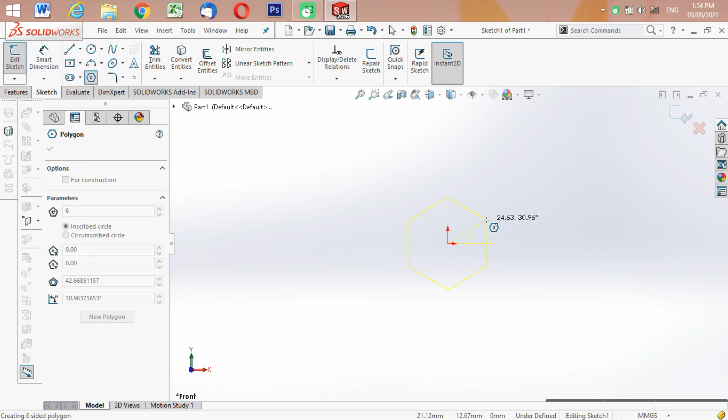Select extrude, click front plane, click polygon and draw polygon. Click circle, draw a circle and click OK.

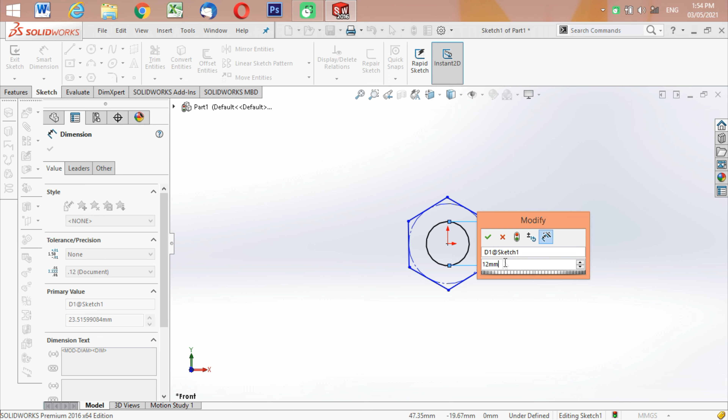Enter dimension, 12mm. Polygon, 18mm. Click OK.

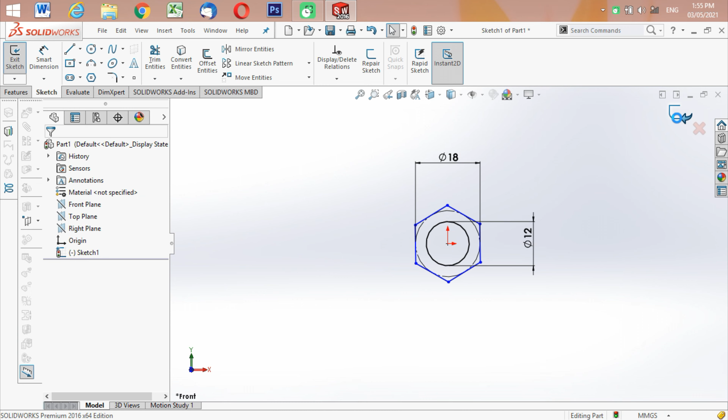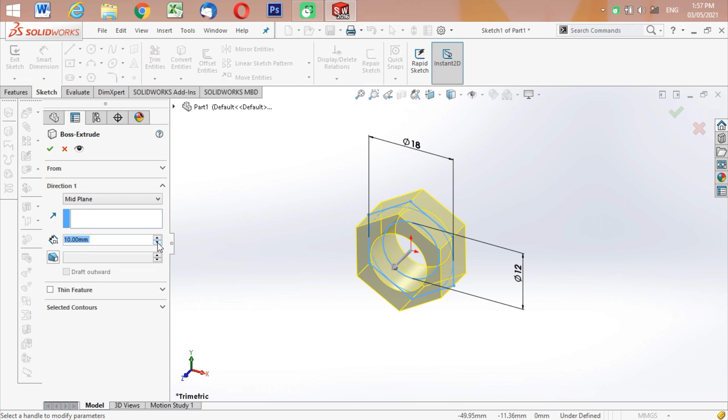Select boss extrude. Select mid plane. Can add the parameter. It is your option if you want long or short.

Select helix and spiral, click here. Select circle and draw a circle. Click OK.

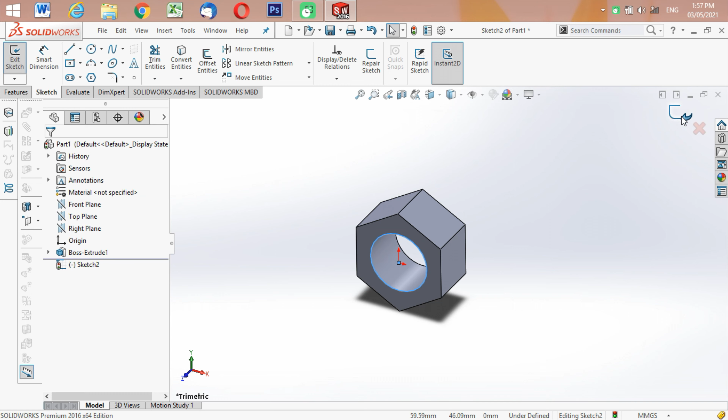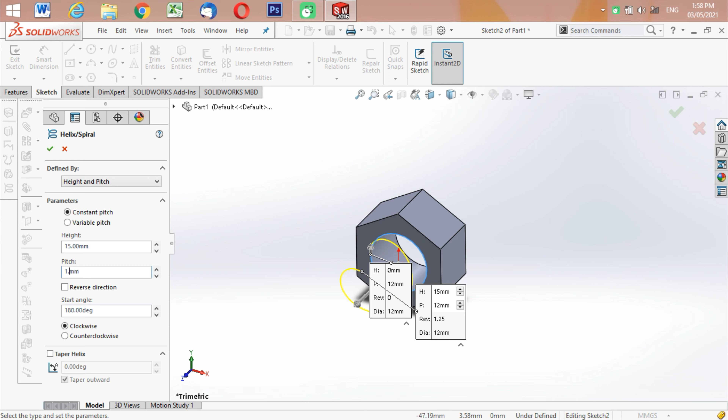Exit sketch. Select height and pitch. Height: enter height 15mm, and pitch 1.75. Okay.

Select reverse direction. Start angle 0.0 degree. Click OK.

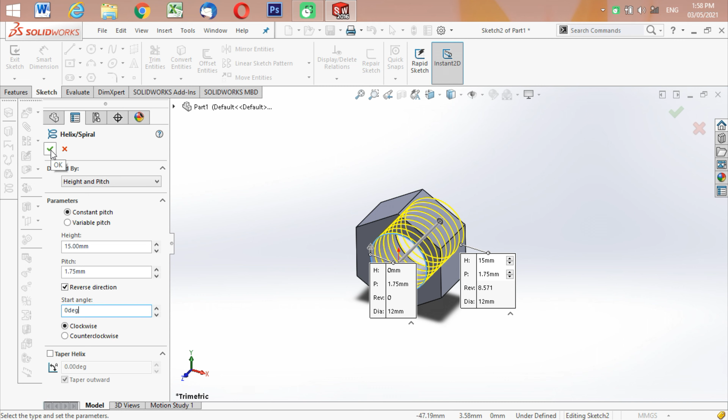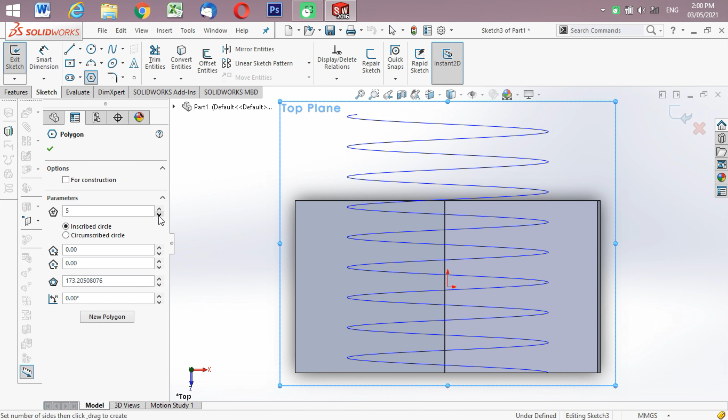Select top plane. Click polygon. Parameter 3, yes, draw polygon. Click OK.

Enter dimension. Yes, distance from here to here: 10mm. Click OK.

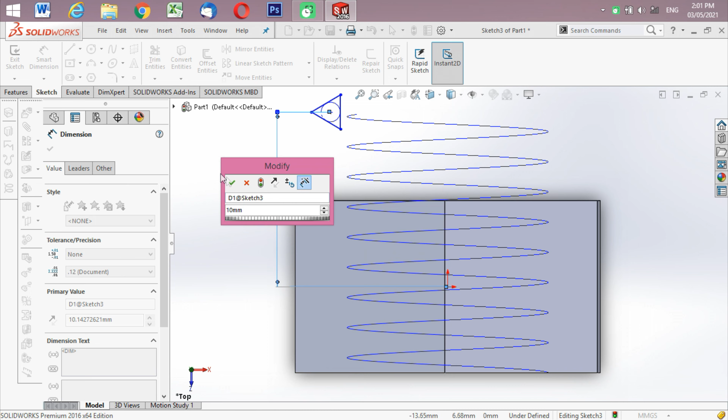Yeah, from this point to here. 5.41mm. Click OK.

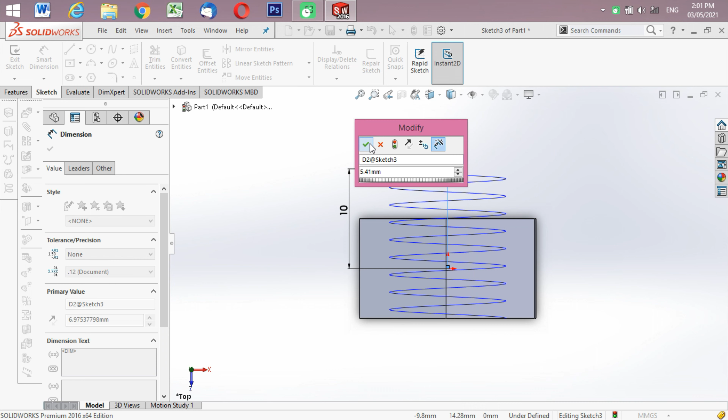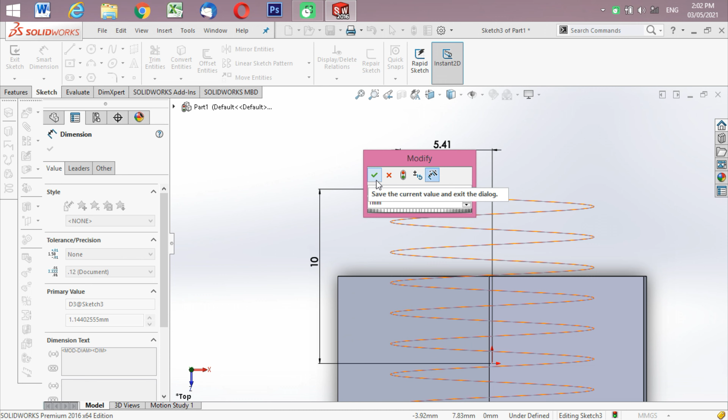Click OK. And click OK. Exit sketch.

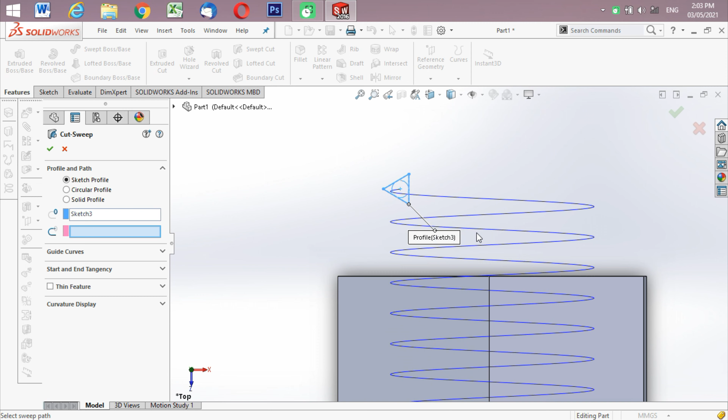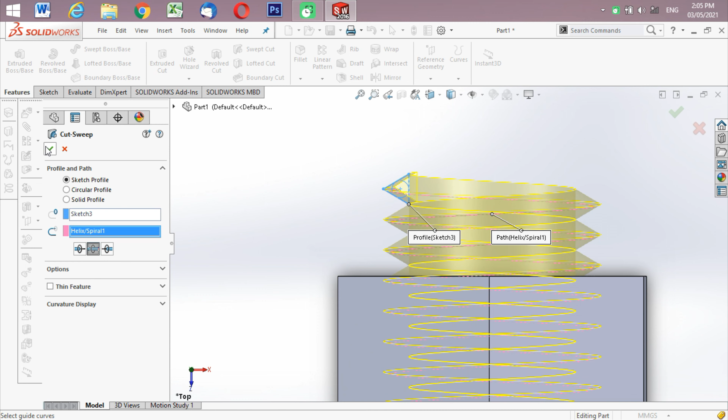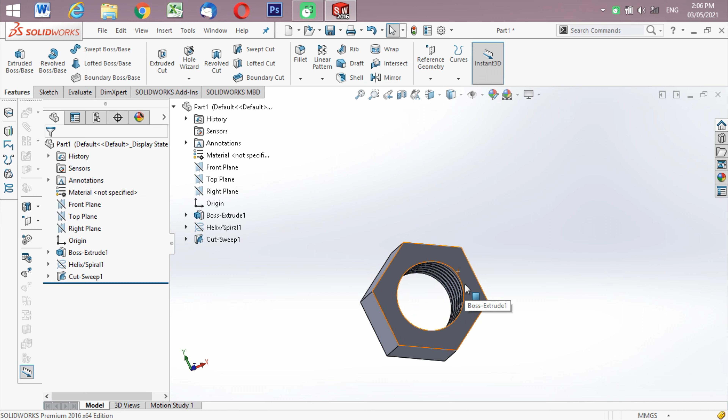OK. Hide this helix and spiral one. Hide. You see that? Rotate to review.

Click this surface, sketch. Select circle, draw circle. Enter radius 8.5. Click OK.

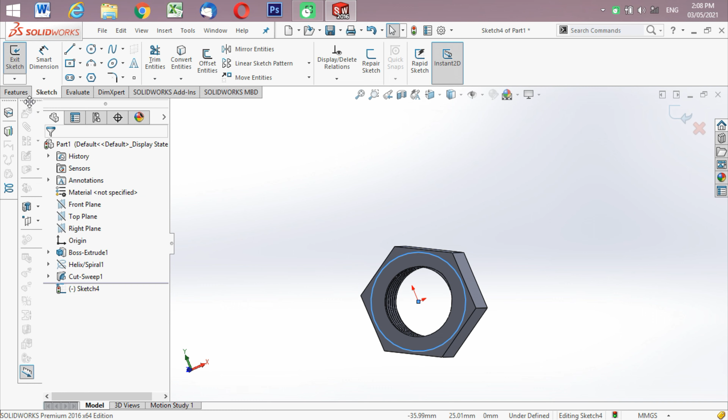And on extrude cut. Click flip side to cut. And click on draft angle 45.0 degree. Okay, yes, click OK.

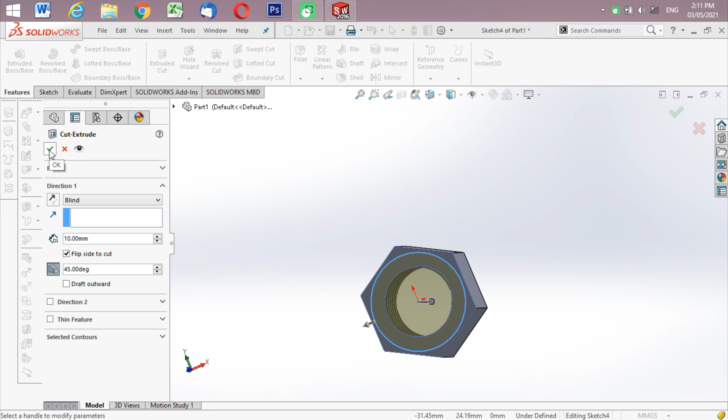Yeah, we get like this.

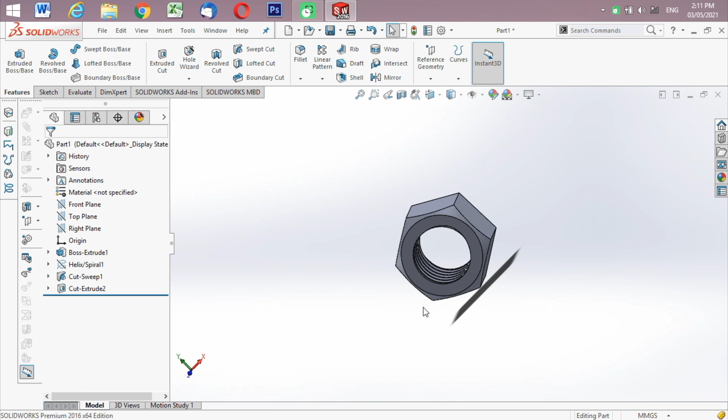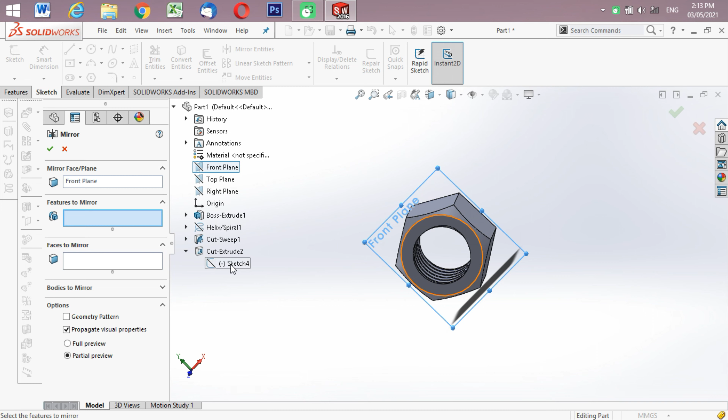Select mirror. And select here. Select front plane. Select on cut extrude 2. Click OK.

Yeah, see that. Yeah, finish. If you want to change material, edit material, you can click here and select the material alloy steel. Yeah, apply, close. You see that, it is so cool.

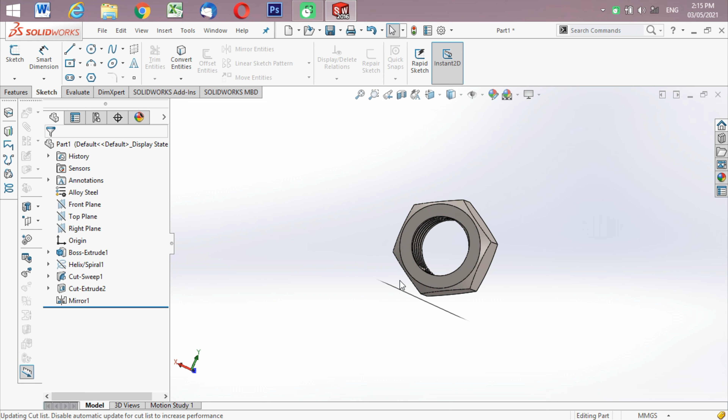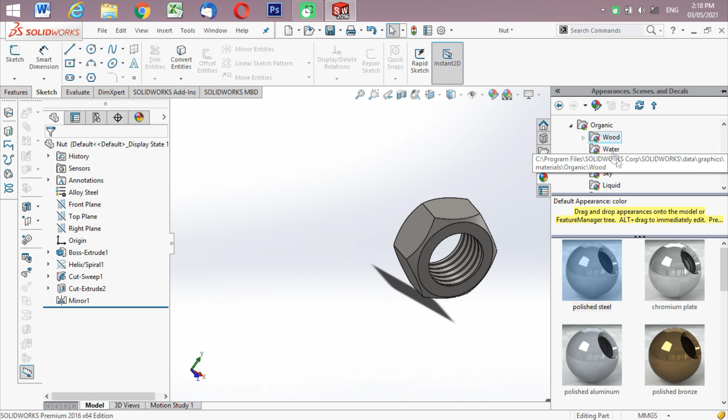Rotate to view. You can change another color. Select on this and select on organics and select on sky. Click close, you can add another color. It is your option. Now finish designing a nut.